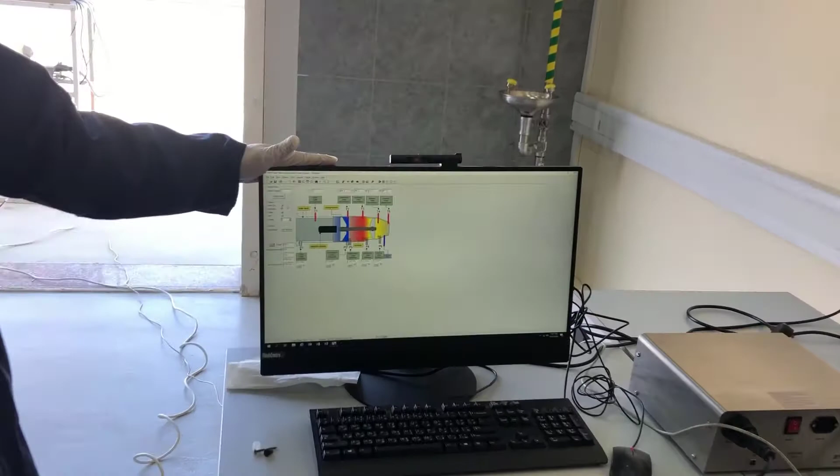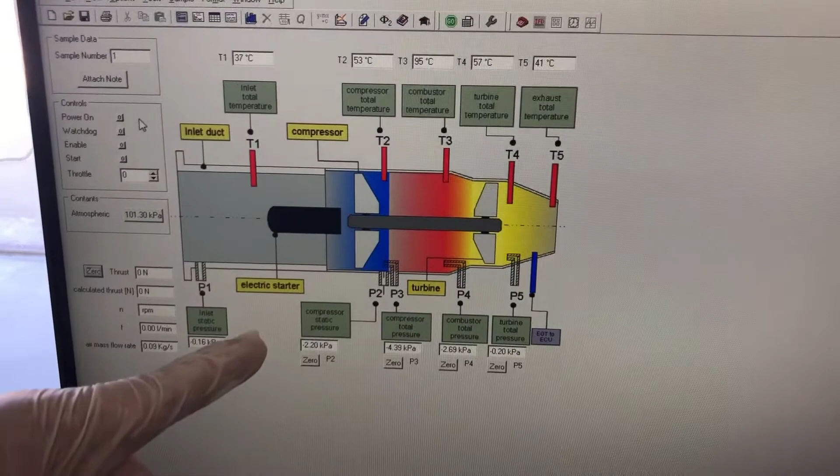So first we will discuss the equipment that we're going to use. The jet engine that we have here is manufactured by Armfield. We have one software wherein we can do the control, and all the readings we can take from the software. So here, as you can see, we have the mimic diagram of the complete gas turbine: the inlet duct, the compressor side, the turbine side, and the electric starter. All the temperatures and pressures at each point are given by this software.

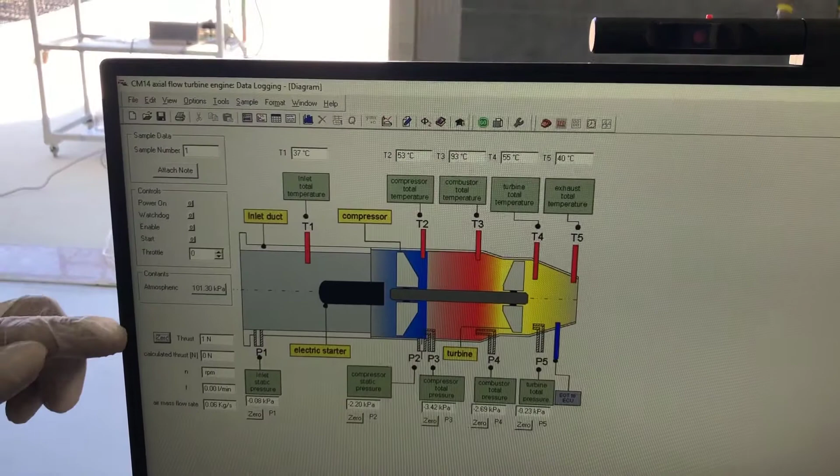Now on the left side, you have the controls: power on, watchdog, enable, start, and throttle. We will discuss this later during the experiment on how to control the equipment. Below it, we can read the thrust produced by the turbine, the calculated thrust, the RPM, and the fuel consumption. This is the volume flow rate of the fuel. Below it, we have the air mass flow rate, the air coming into our turbine.

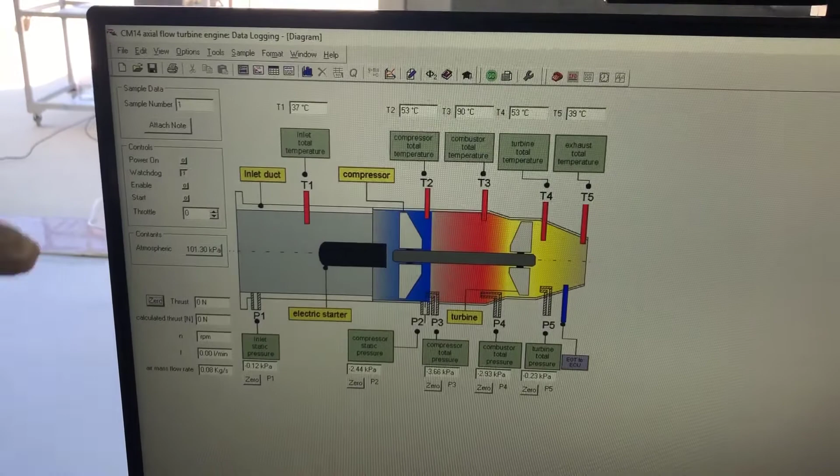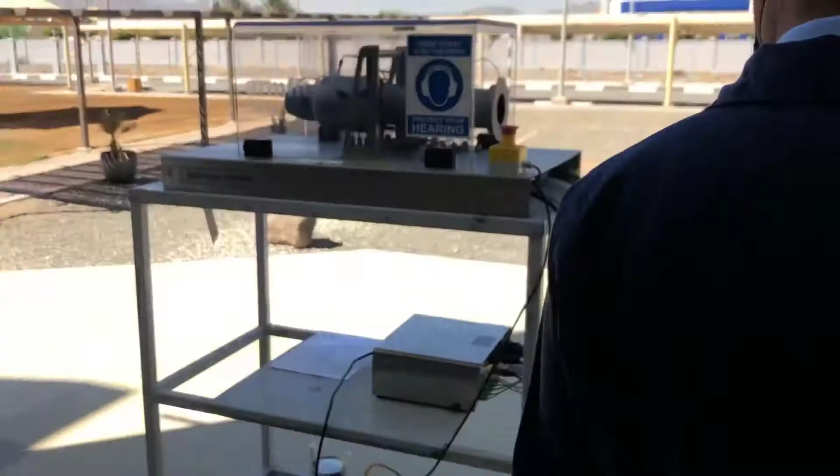So there are three parts of this equipment: one is the software, second is the electric console, and then the equipment itself. First, this is the software. Next, let's go to the equipment. So this is the electric console, the interface between the computer and the equipment. This is the second part of our equipment. And the third part is the gas turbine itself.

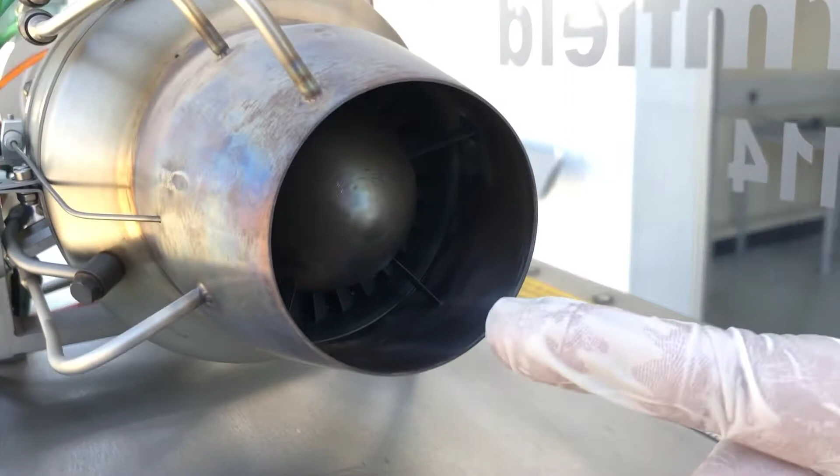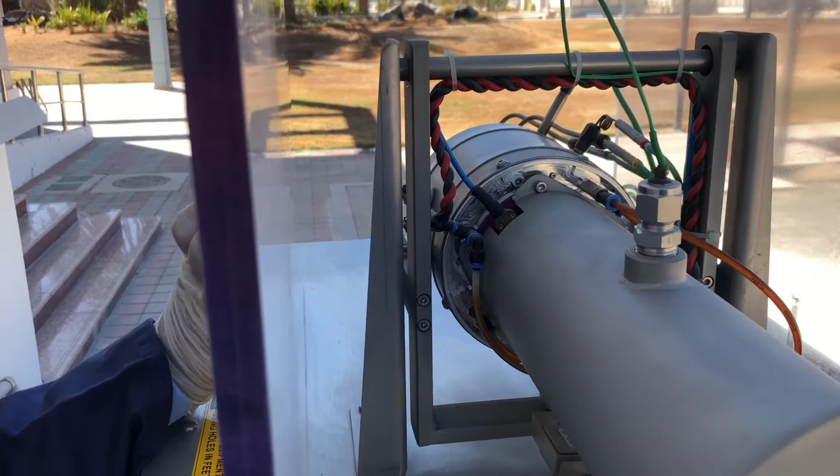So we have here the air intake, it will come from here. We have one compressor here, the combustor, and the turbine itself at the end here. As you can see, if you get closer, the turbine blades are inside. So the process in this experiment: from the air intake, the air is compressed inside, and then there is a combustor in between. Introducing the fuel and the air, it will burn and run the turbine.

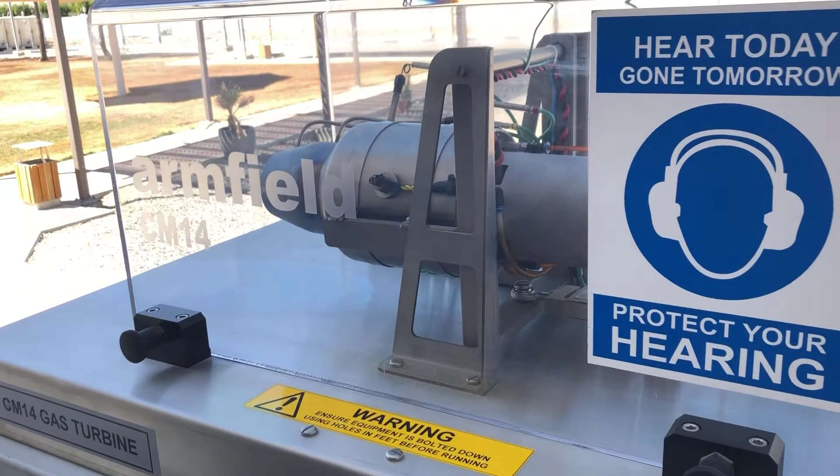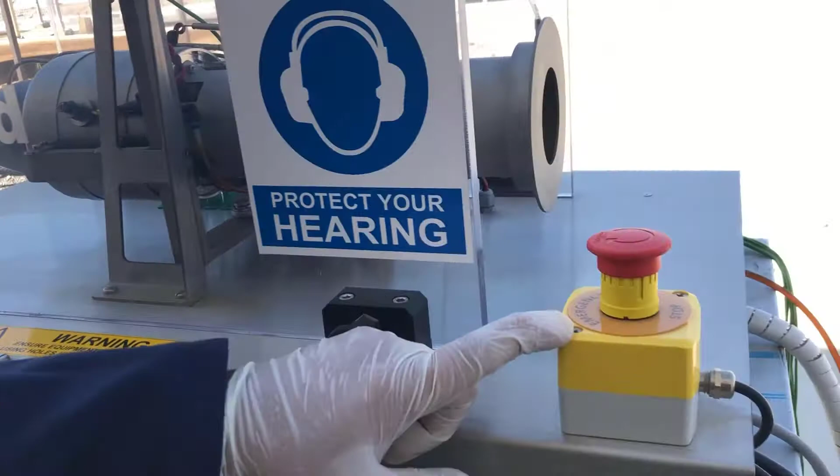So in the first experiment, we will help the students familiarize themselves with the control of the equipment itself, before proceeding with experiment 2, the second experiment on the gas turbine, which is the enthalpy entropy diagram. Here we have one emergency control. We have the fuel tank below. So these are the parts. And we have one more emergency switch far from the equipment, so just in case there is a malfunction, we can shut off the equipment from afar.

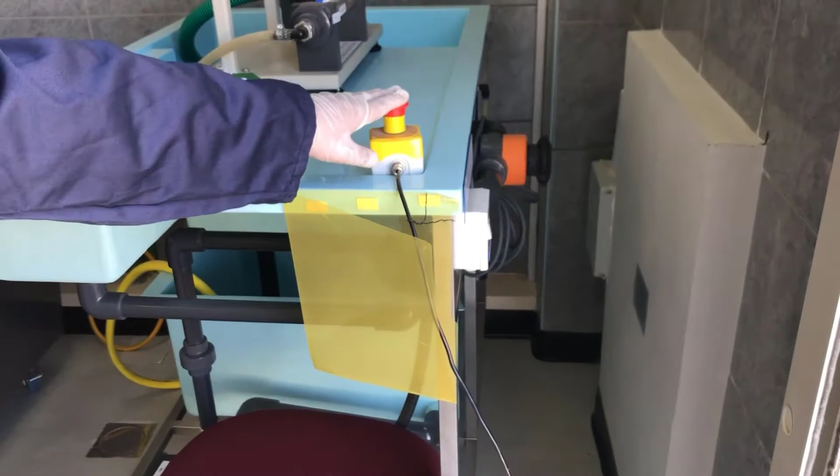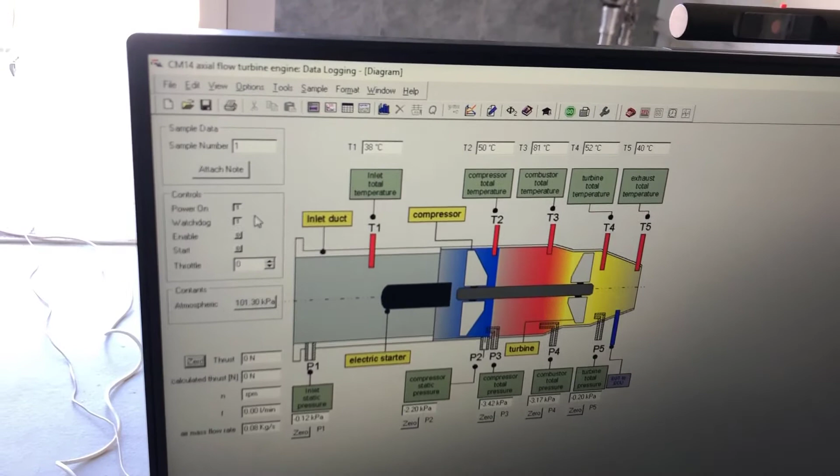So let me teach you how to start the engine. To start and control it, you have the power on. As you can see here, the designation is 0. Once you press this, it will become 1, which means it is active. Then the watchdog keeps on blinking from 0 to 1. Then press the enable button and start the engine.

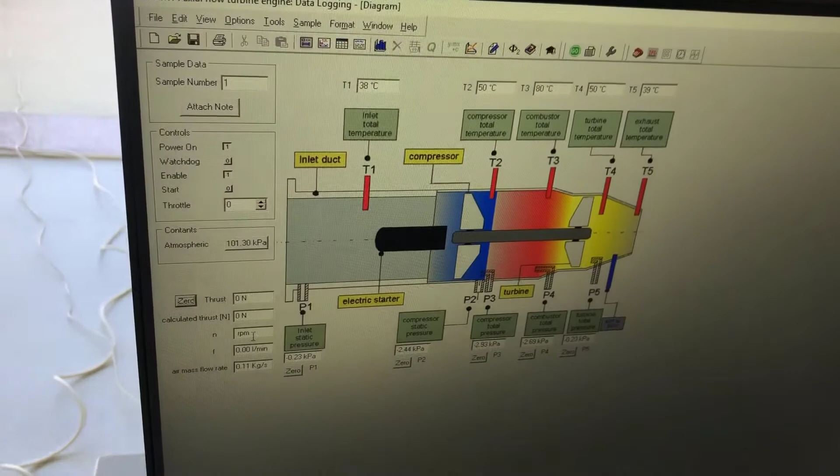At the beginning, in the idle state, you have 0 throttle. At 0 in the idle state, the RPM of the gas turbine is almost 37,000 RPM. So at the beginning, we will start this, and then we will introduce throttling in terms of percentage, 10%, 20%, and then we will take the reading for it. This green button here is to control the data sampling.

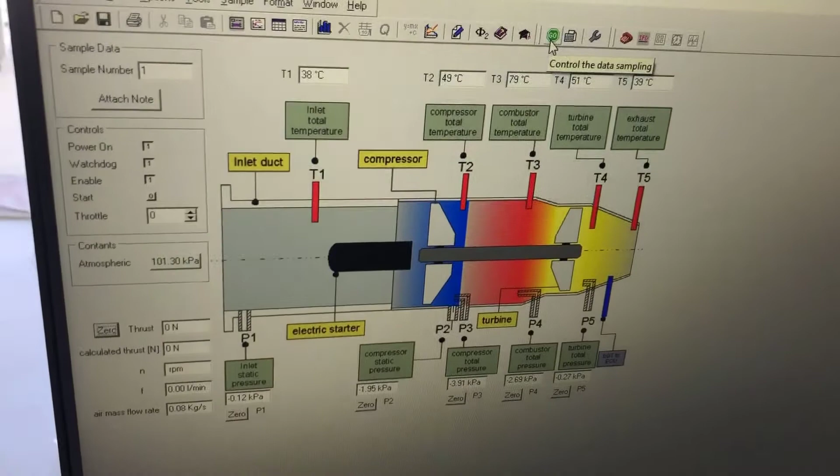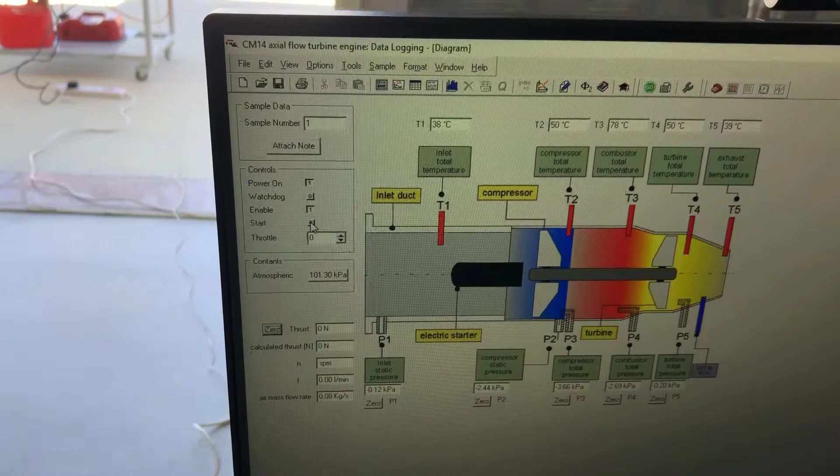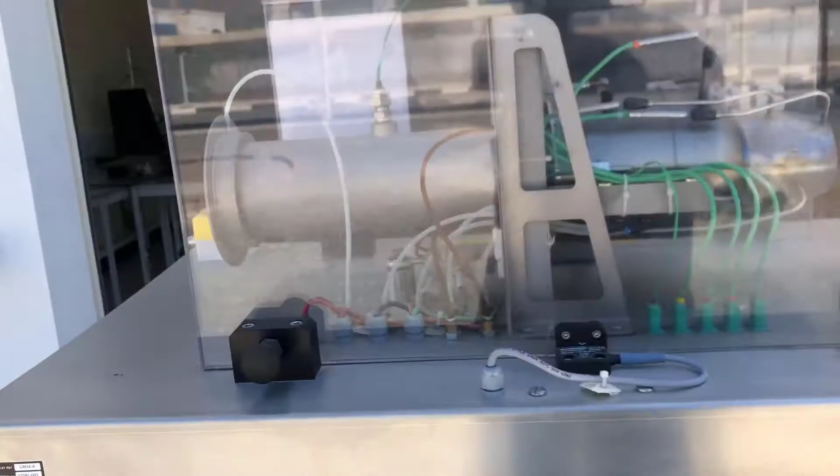So we will run the equipment in its idle state. To start, there is a start sequence. When you press this, just wait for 30 seconds before the engine starts. So this is the starting sequence. As you can see here, we have 38,000 RPM. We are in the idle state.

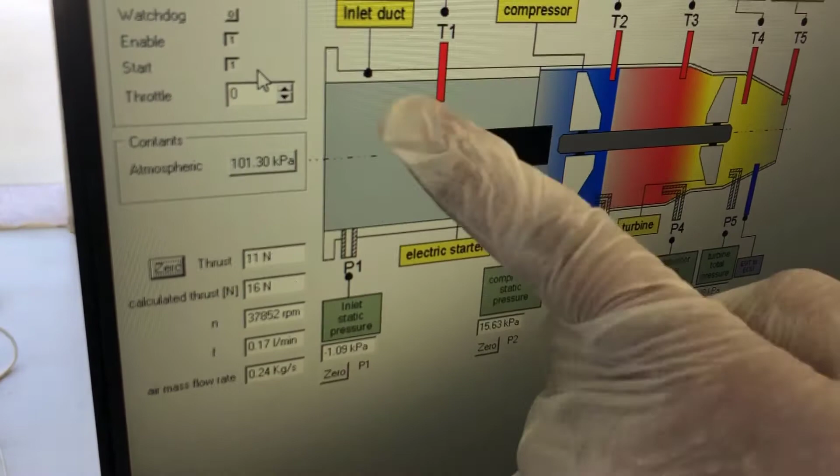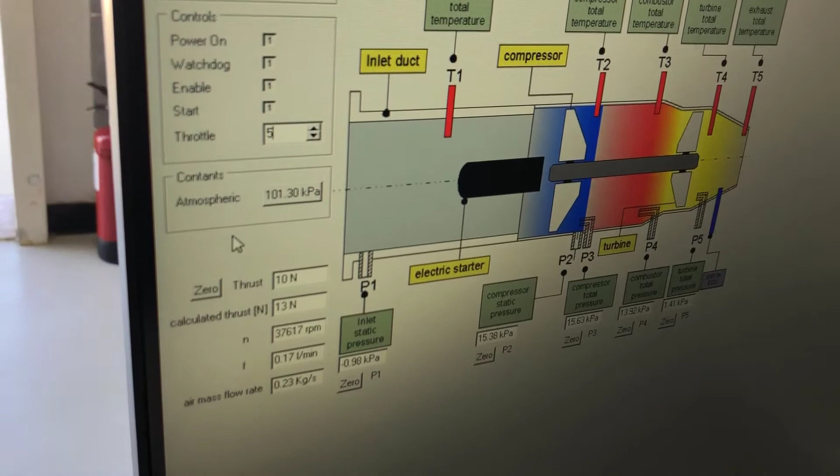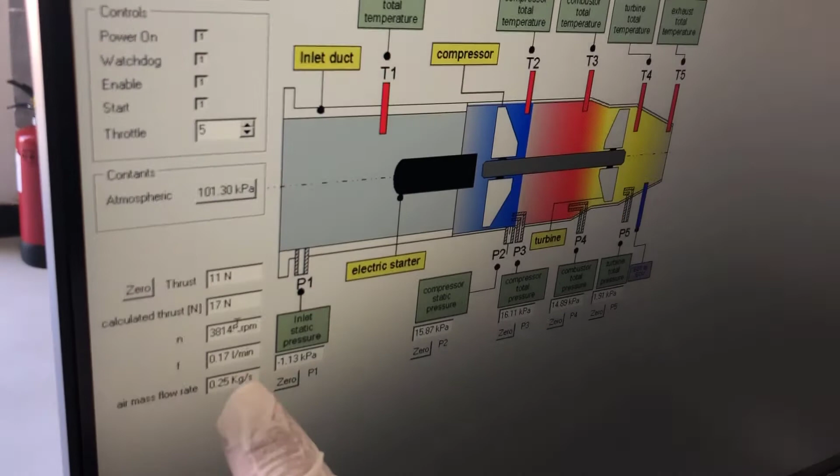At this point, we will introduce, for example, a 5% throttle. Just type 5 and observe the RPM. It is now increasing from 37, 38, 39. As you increase the throttle, it will increase the RPM. Take a look at the fuel consumption. And now we are ready to take the reading. Press this button. It will take the sampling automatically, 15 readings, at 6% throttle. Okay?

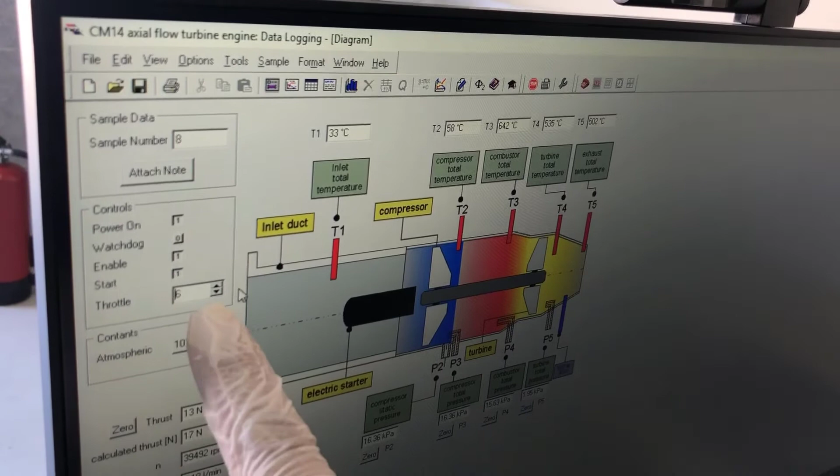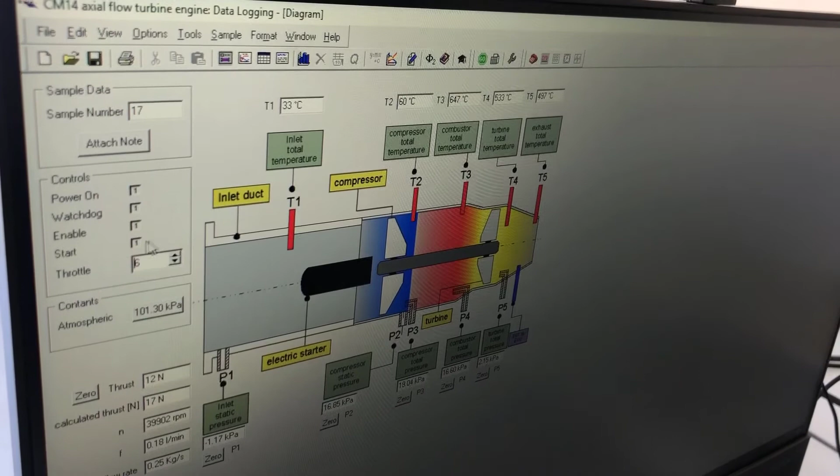Once we get at least 15 readings, we can stop the reading here. Now, to stop the engine, you can just press the start button again and it will go to the stop sequence. Press this one. Wait for some time before it completely stops.